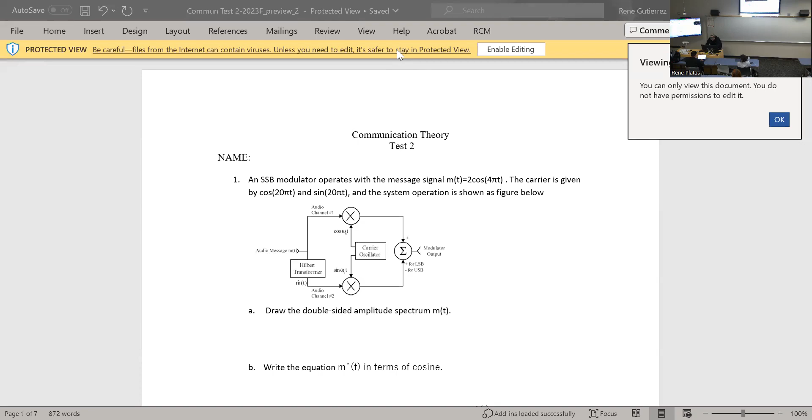But then if you see the screen share, you can't see the whiteboard. Stop share. Okay, I have to pin myself in order to record the meeting.

¿Qué onda? ¿Qué hubo? No, dale. Ahorita estás pidiendo. Good job, sir. Nobody else wants to come in?

Good afternoon, class. The first one is an SSB. What does SSB stand for? Single sideband, probably.

Modulator operates with a message signal. m(t) equals cosine, 2 cosine, 4 pi t, that's 2 hertz, right? 2 hertz. The carrier is given by cosine 20 pi t and sine of 20 pi t. This is the message.

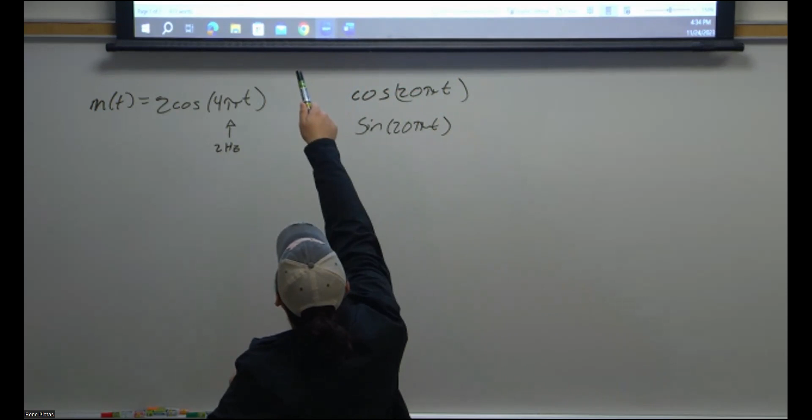The system operation is shown in the figure below. So it looks like it's the audio message signal, the Hilbert transformation. Do you guys remember what a Hilbert transformation is? I talked about it, all it is, you add or subtract, I forget, 90 degrees to the current message.

In essence, let me see, trying to find my notebook. The Hilbert transformation is the only one that doesn't change from frequency to something else. But anyway, let's deal with this problem. I don't know how important it is to remember what the Hilbert transformation is. Write it down somewhere, I don't want to give wrong information. That's all.

Hilbert, aha. So the Hilbert transformation is when you get your regular signal.

Renee, it's out of focus. Oh no, what, how did that happen? Did it just randomly happen? Yeah, weird, yeah, probably. Wait. Okay, yeah, that's good.

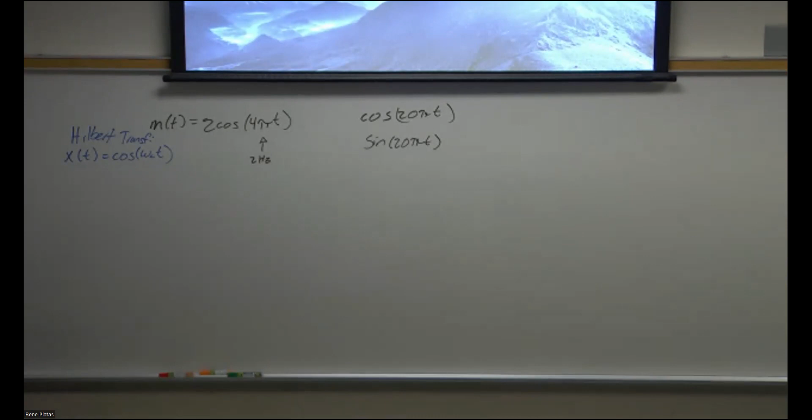So the Hilbert transformation is when you get your regular signal, and then all you do to get the Hilbert transform, which is this little hat here, is get cosine of the same thing, but you take away 90 degrees. That's just a little phase shift, that's all the Hilbert transformation is. Or you can also say cosine of omega minus pi over 2. Okay, so essentially you're getting the 2 channels there. One of them is doing cosine, the other one's doing sine, but in reality, they're both kind of doing the same thing because the transform changes the phase of it a little bit.

But anyway, what's the question? Draw the double-sided amplitude spectrum M, which is gonna be the message signal. Okay, now it says M(t), not M and t, remember? So we look at our thing here. It says double-sided, so it has to be centered at 0.

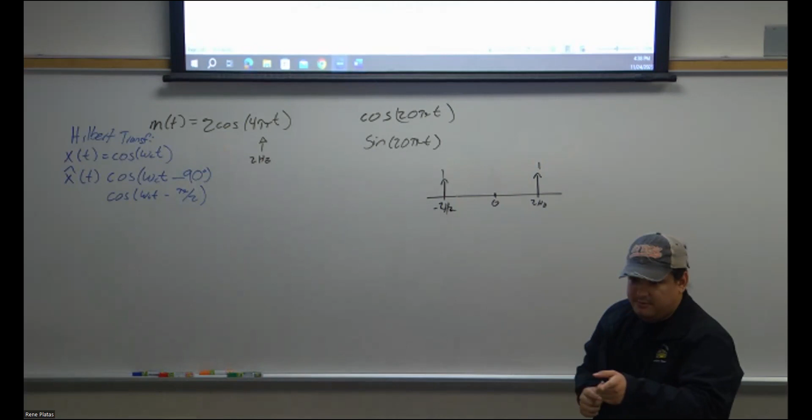And then we said this was 2 hertz, and there's gonna be one at -2 hertz, and the amplitude would be half of that, this is 1. Easy peasy, right? Is that what he said? Okay, peachy peachy, right? It says M(t), that's important, not M and t.

Next one. No, it says write the equation in terms of cosine, m hat t. So that's this one right here.

So we have our m(t), now our m hat t is going to be equal to 2 cosine of 4 pi t, minus, yeah, minus 90 degrees, or pi over 2, if you're feeling fancy.

That's it, it's also in terms of cosine, right? Right, okay, let's just put this one for that. This is the Hilbert transform, you can transform, you get your function and then you just shift it by 90 degrees. Pretty cool, right?

And then draw the double-sided amplitude and phase spectrum of m hat t. That's this one right here. Green.

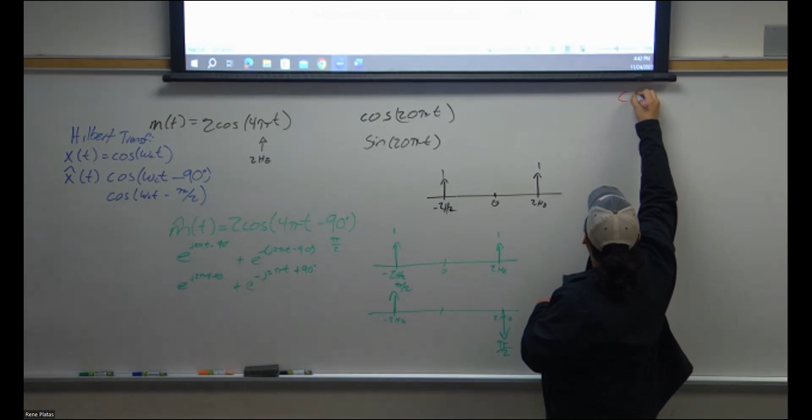The cosine of x is equal to 1/2 of e to the j of x plus e to the negative. That's where we lost the 2. From here to here, that's how we lost the 2.

Any questions? Nicole, you're being awfully quiet. No, guys, turn your cameras down.

Any questions before I delete this? I'm gonna keep this up so we can refer to it later. Can you move it to the right just a little bit? Oh yeah, you can see that? It's just out of sight. Make it a little bit smaller. How's that? I think that's good. Erase it, it says cosine.

Negative j2 pi t, the omega CT, it's like a basic... Oh, Euler's identity or Euler's formula. It's something to do with Euler. Okay.

Well, the double-sided amplitude, okay, we just did that. We did both of them, right? Oh, we didn't do the phase for this one. The phase for this one is pretty much there's 0, there's 2 hertz, there's negative 2 hertz. Since there's no phase shift here inside of the cosine, they're both 0.

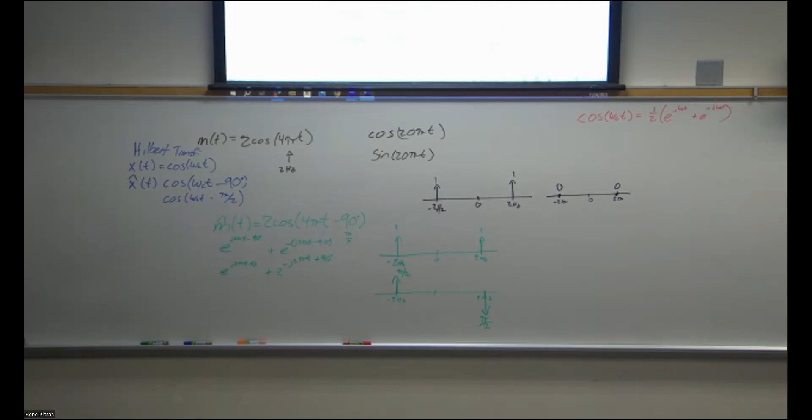Okay, sorry, you're right, sorry. Okay, can I erase this? Okay. Well, it's not that it's wrong, it's that the question was read incorrectly. So in a way, the question was wrong.

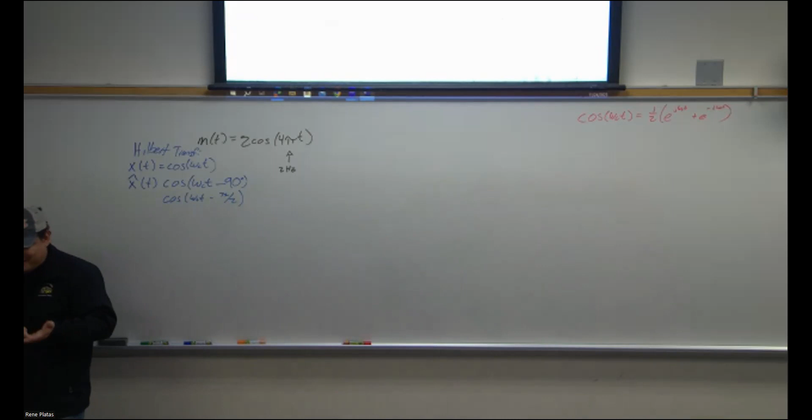Oh, it's because we did MT, the double-sided spectrum of MT, the message signal, M hat T in terms of cosine, which stayed the same. We did the amplitude and phase of MT, but then I thought this was the same thing as this, but it's not. It's a little bit higher frequency.

So for 1D, for people that can't see me pointing at the television here, 1D: we have draw the double-sided amplitude and phase spectrum of MT times the cosine of 20 pi. They're being multiplied, aren't they? For the problem, so we have our message signal, which is 2 cosine of 4 pi t times the cosine

of 20 pi t. And that is difficult, but we can do this together. That's 2 cosine, where's it at? I think it's half. 2 times 1/2 of cosine of 24 pi t, plus subtract them, cosine of 16 pi t. Is that so? Yes, yes, it's a trigonometric identity.

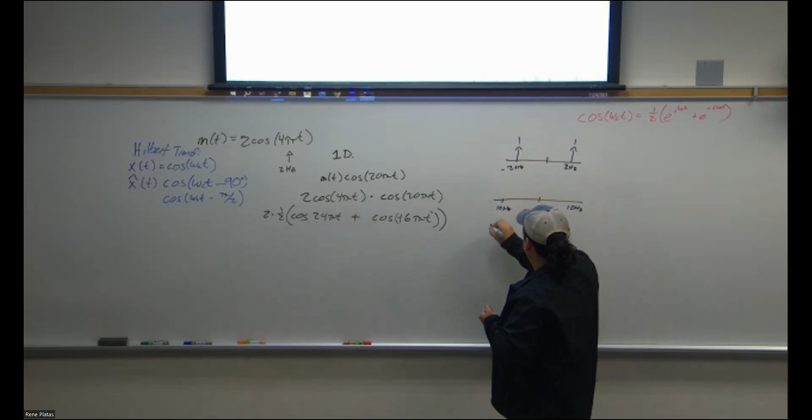So all we gotta do is take this bad boy right here, which is 1 and 1, if you recall correctly. We take this back over here, which is the same thing, but it's 10 hertz and 10 hertz. And they're both, well, this is actually one, so it's 1/2.

And we do the convolution. Easy peasy, right? You could do the trigonometric identity, but don't think, like Dr. Sun says, don't think it's easier to do it this way.

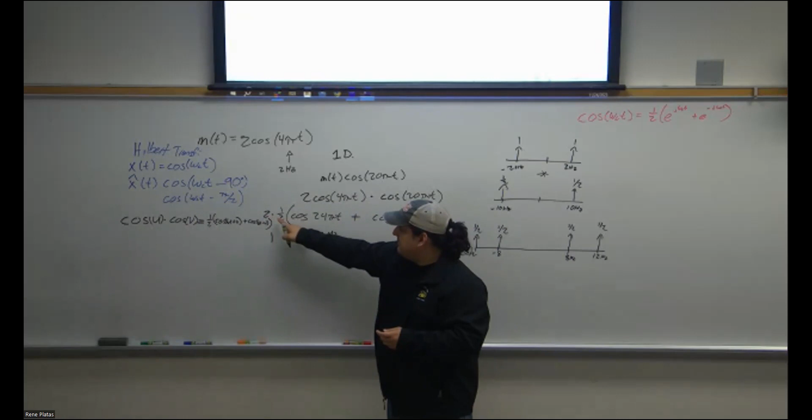So this 2 here, that canceled out by the cosine multiplication formula, where I believe it's cosine of u times cosine of v is equal to 1/2 cosine of u plus v plus cosine of u minus v. See this? So when you multiply 2 cosines, you get half of the amplitude, which is what we got canceled out here. That should have been another color. Man, I'm not used to drawing one.

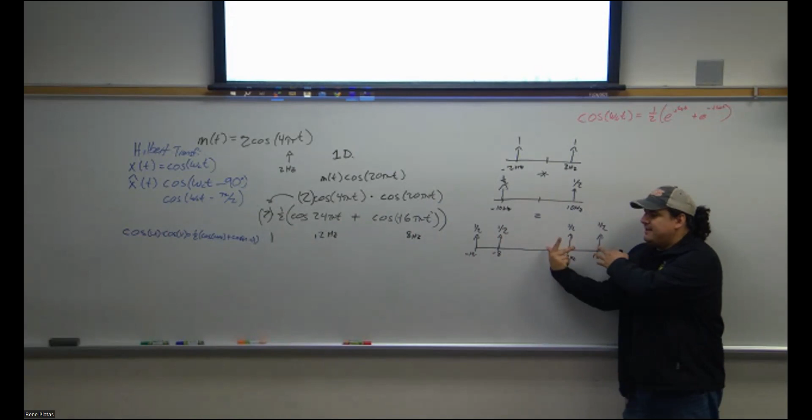Anyway, any questions? Nicole, Aaron, Carlos? On the third amplitude spectrum, those 4 numbers are 1/2, right? Yes. All 4? 1/2. Okay, thank you. Now, the amplitude here is 1. Why are they half? It's because it's double-sided spectrum. If you were to bring them back together, it would be 1. Okay.

All right. Here's the game. Draw the double-sided amplitude and phase spectrum of m hat t and sine of 20 pi t. For the phase of this, it would just be 0, right? For what? Oh, for the phase of this? The phase here, yeah, it'll just be 0. If you were to draw the phase spectrum, it would just be 0, 0, 0, because there's nothing here, there's nothing here. Very, yeah. So let's erase this, if I may.

The reason I'm using such a small space is so that it can be seen by the camera. Otherwise, I'd be all over the place, like I was in the other engineering building where there were all whiteboards.

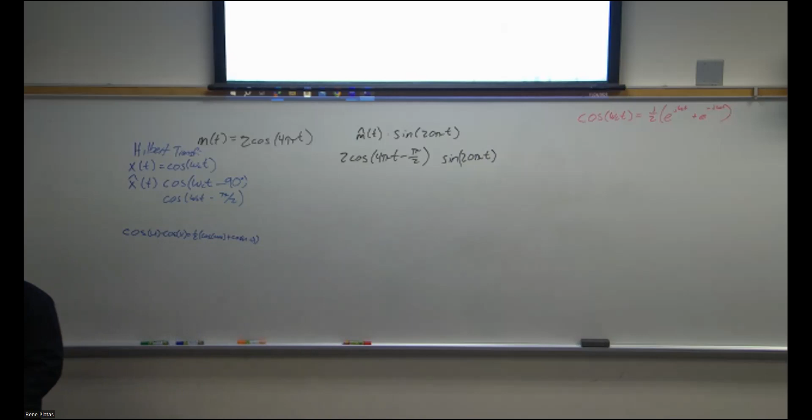Okay. So the question says m hat t, well, let's write it first. M hat t times sine of 20 pi t. M hat t is this minus 90 degrees. So that's 2 cosine of 4 pi t minus pi over 2. And this stays as a sine of 20 pi t. Now, we could just plug it in, but I think it's best to turn this into a cosine first, right? Yeah. So, in order to turn a sine to a cosine, I just don't remember if it was subtract or add 90 degrees.

That's where you wanna move it now. Yeah. So if you wanted to go from sine to cosine. Right. Yeah, but he's been saying just subtract 90, so just subtract. Yeah, so the sine is like this, and the cosine is like this. Right? So you want to move the sine to the left 90 degrees. So wouldn't that be 20 pi? Oh, wait, no, you're going to cosine, so yeah, it'll be minus 90 degrees. Minus pi over 2.

Right? Makes sense. You have a cosine, but you want it to be the same value as this, you move it to the right. Over 2 times, okay. Well, now you multiply them. Same thing happens. We have to do the same formula over here.

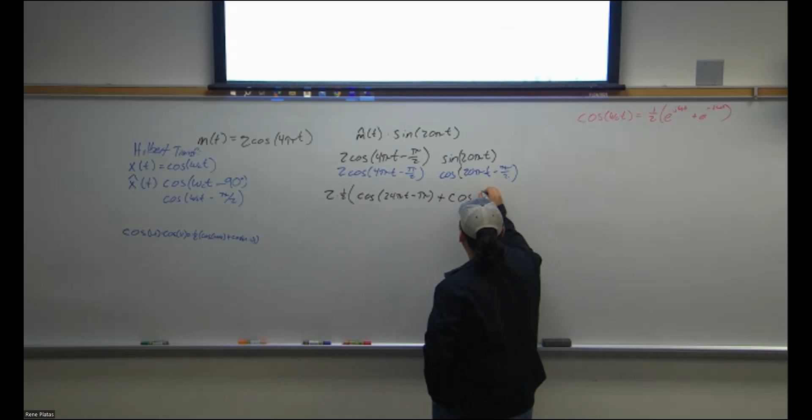Then we go 2 times 1/2. Sum of this, which is cosine of 24 pi t. Sum of this is minus pi, right? And then you add the cosine of the difference, which is 4 minus 20, minus 16 pi t. Difference will be 0. That stays the same. And that's it.

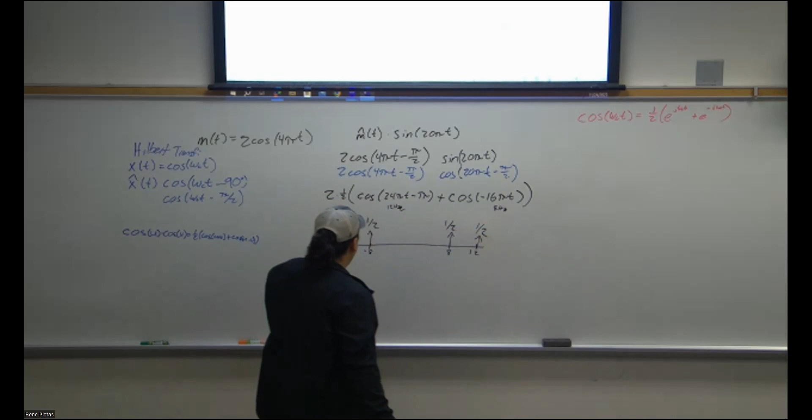Then the question says draw it. So we have our amplitude here. This one's 12 hertz. This one is 8 hertz. So we can go 8, 12, negative 12, negative 8. And their amplitude is all of them going to be 1/2. And that looks identical to the other one before, isn't it?

Again, this is the hard way. We could have done it the easy way afterwards, but that way we can visualize what happened to this phase here by doing it like this. And now for the phase spectrum, we have to draw the exact same frequencies. At negative 12, which is here. I like to transform it into an exponential first so that I can see what happens to the phase.

This one becomes e to the j 24 pi t minus pi, plus e to the negative j. Negative gets distributed, I forgot the e. So at positive 12 hertz, we have a negative pi. And at negative 12 hertz, we have a positive pi. So remember that the phase diagram should be symmetrical about the origin. So if this is going down, this is gonna go up.

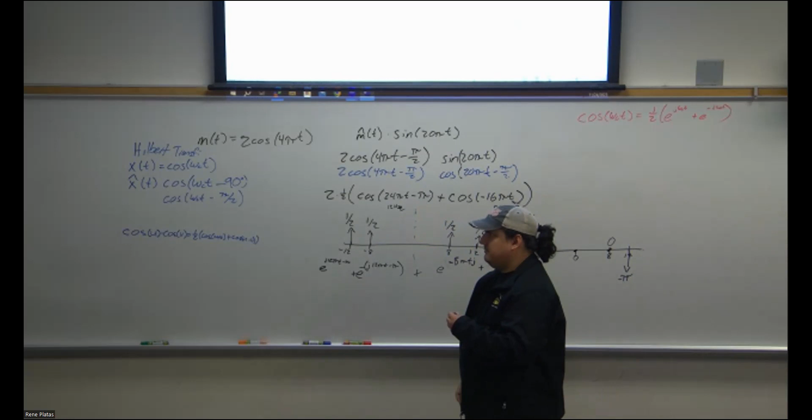So this is the phase spectrum, and this is the amplitude spectrum. Now this is maybe negative pi, but in reality, isn't it the same thing? Negative pi is the same thing as pi. Whatever. He will kill you if they're not symmetrical about the origin. And these have to be symmetrical about the amplitude axis. Questions?

Draw a double-sided amplitude and phase spectrum of modulator output, m(t) cosine and m hat(t) sine 20 pi t. So this plus the other one that was before, which is identical, but different phases. How would that look? Let's find out. If we recall, the previous one looked something like this. It was 2, 1/2 cosine of 24 pi t. There was no phase. Plus cosine of negative 16 pi t. There was also no phase. It was negative. I think it was negative.

Therefore, all we have to do is add this and add that, and we're done. Right? Yeah, it is the negative on the other one too. Maybe I was wrong there. Anyway, this is equal to m hat(t) times sine, and this is m(t) times the cosine of 20 pi t. So all we have to do is add this, add that, and the amplitude is 1 for all of them.

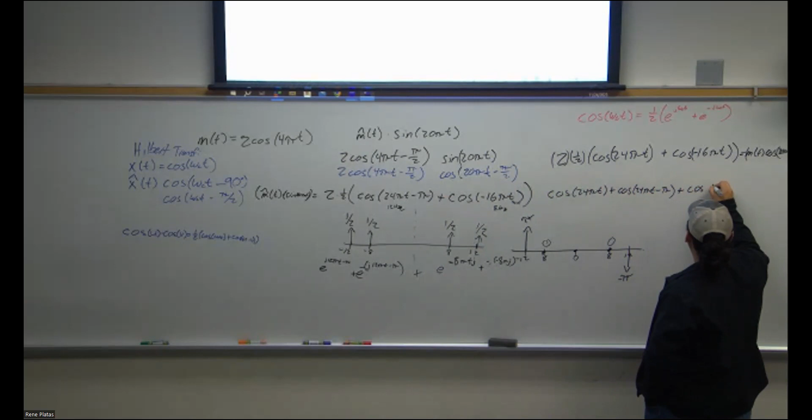So we get cosine of 24 pi t plus cosine of 24 pi t with the phase shift, which is minus pi. Plus cosine of negative 16 pi t plus cosine of negative 16 pi t, which is just double that. However, these two cancel out, because they're 180 degrees out of phase with each other. So these two go to 0, and all you're left with is 2 cosine of blah blah blah.

Is that what he put on this when he was working on it? I had done it, he gave me 100 on it, but he also said in class, just because we got 100 doesn't mean it was right. So I don't know if mine was right. You made it equal 0? Yeah, I had that equals 0 and I had 2 cosine of the negative 16. I lost my paper, so I'm not sure. So nobody was paying attention during this? Well, I think this goes to 0. We were doing the review, skipped this one.

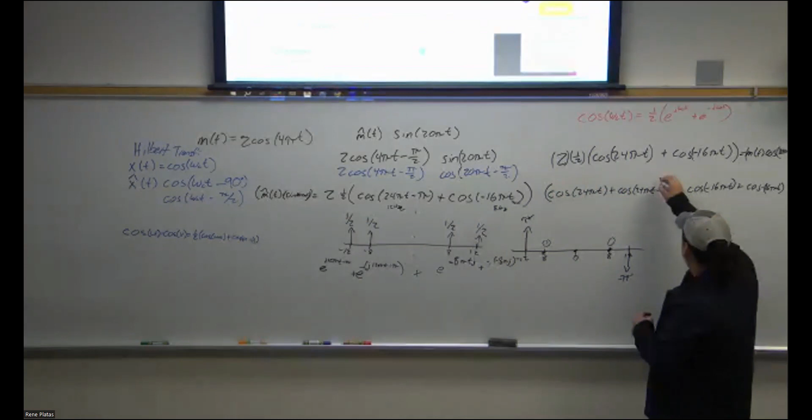Now what you're left with is 2 cosine of negative 16 pi t, bada bing, bada boom. And the question was, I don't even know if I'm answering the question anymore. The question was, draw it. So this is the only output. So we have our 8 and our 8 hertz. And the amplitude is 1. That's it. That's the answer for 1F.

Questions? Yes. In this case, yes, basically 0.

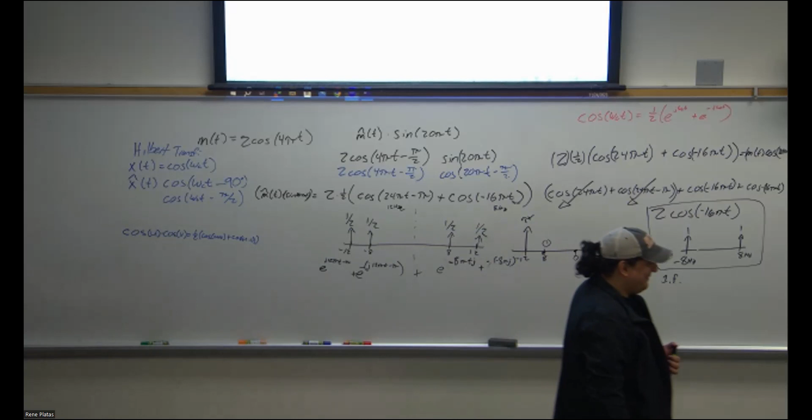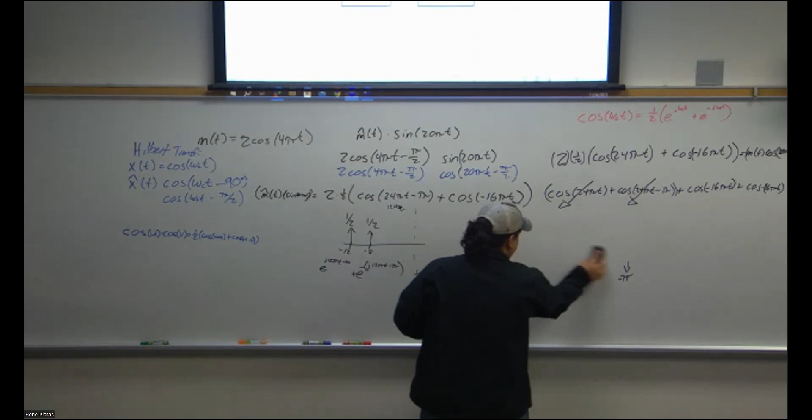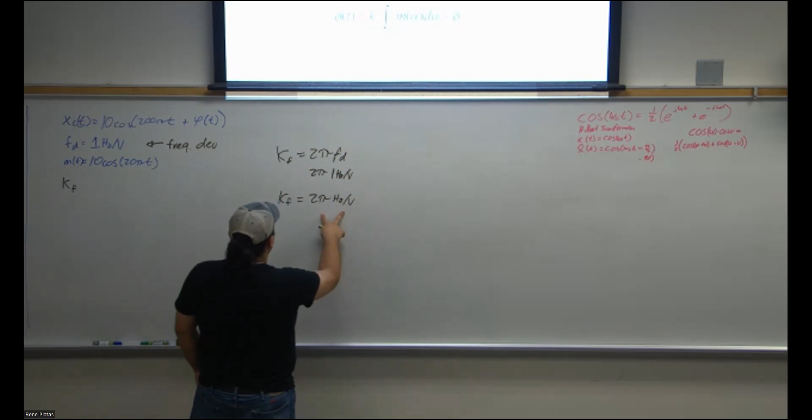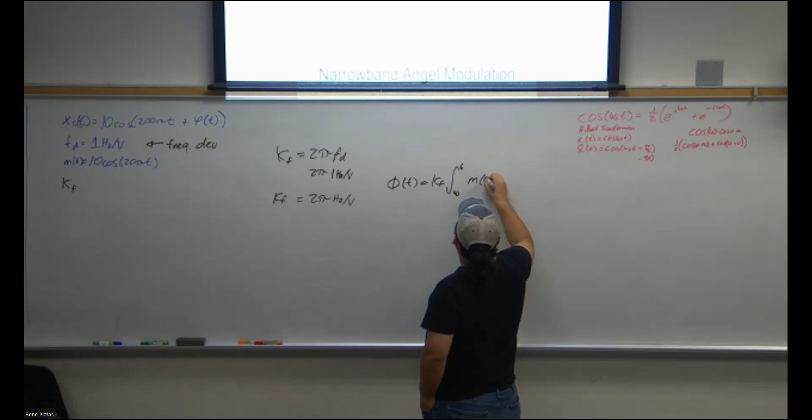Pretty sure. No, it's actually... Hold on. We just got our kf. Now, in order to get phi of t, we have 10 cosine 20 pi t. Oh, slow down. We have our this. I don't know what this is. But this equals kf times the integral over t. Are they both alpha? Yes.

Okay. And then we did 2 pi. We know what kf is. kf is 2 pi, right? This is from the beginning to one time interval, I'm guessing. So this is just one cycle. Does it matter? Okay. So m of alpha is 10 cosine 20 pi t. Guessing this is the message signal. So 10 cosine of 20 pi t, and then dt, not just in terms of t.

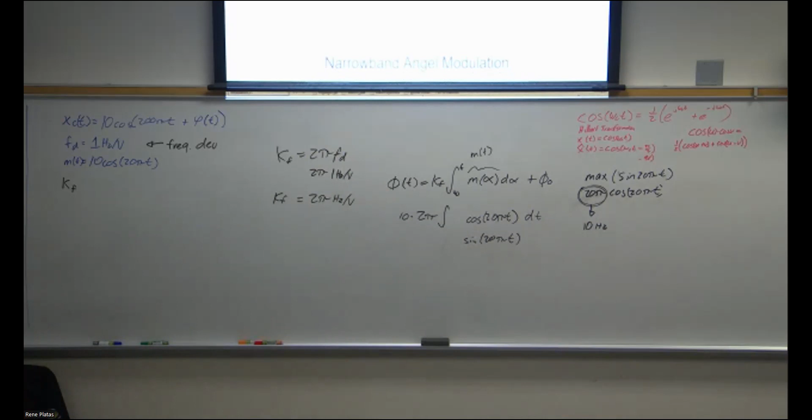This question says modulation index, which I need to find here. The constant beta is known as the modulation index, which is equal to these formulas. In this case, is it frequency or phase? FM modulator. So our formula is kf Am over omega m for the beta value. What is this, 3C right now? 2C. For those watching at home, modulation index beta is equal to kf Am over omega m, kf being that.

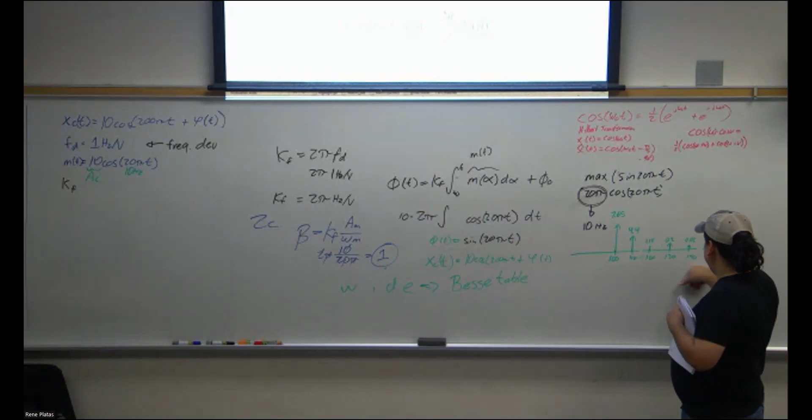Okay. So if they go in steps of time to look for time samples and you're multiplying also by 10? Well, they just both happen to be 10 in this case. The amplitude is 10 and the frequency is 10 hertz. In this case, they just happen to both be 10. So if that was like 12, you multiply it. And now this is our base. Okay, sorry, our amplitude. Now, in order to get the phase, we have to look at that, which states Jn is...

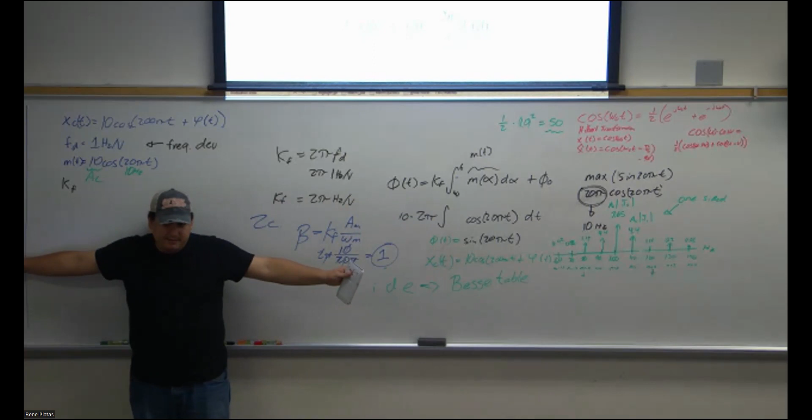And if we put them on top of each other, we would have this. This is the amplitude of the outputs.

Determine the power at the inputs. Oh okay, so we already got the x(t). Now we need to calculate the power at the input and the filter output.

So when we put this into a filter, a bandpass filter, it's gonna look like this. We said that the filter was center frequency of 100 Hz, so the filter is gonna be right here in the middle. And the bandwidth is gonna be 50 Hz, so it's gonna go 50 Hz across, something like this. Right, 10, 20, 30, 40, half, 50, right? The bandpass filter is only letting these through, not these.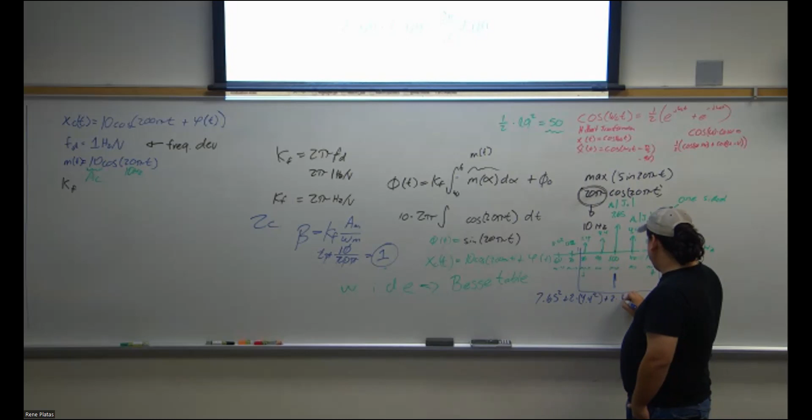That's the power at the inputs, no, that's the power at the outputs. This is the power at the output. Right? I just forgot the output again.

Well, it was given in the problem, at the beginning, that the center frequency was 100 and the bandwidth is 50. So it's just 25 this way, 25 that way, centered at 100.

And it's 49.94, that's what I believe.

Guessing most of the power is gonna go through because these are very tiny right here, so they're not gonna have that much of an effect on the power of the signal after it's been filtered. So I got 49.94. And the original power was 50 watts, so the filter dissipated 60 milliwatts.

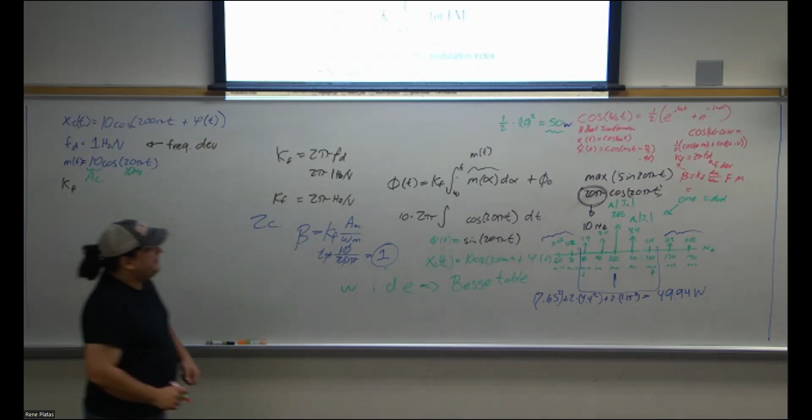Oh, this is very important. There's two of them. Beta is equal to kf times Am over omega m, for FM. And for the other one, AM for PM, kp and Am for PM. That's the case.

Okay. Sounds right. Okay, the other formulas that we missed.

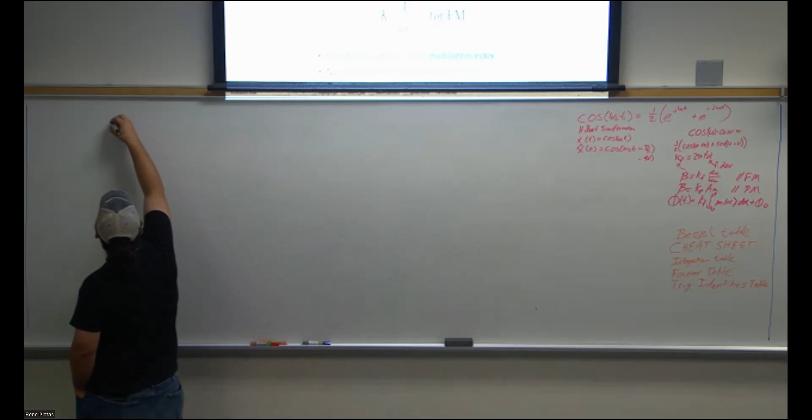Good if I don't make it private. Now I kind of wanna go like, somebody looking it up, like oh how do I do this? Let's put the answers in addition. I just gotta stretch. Just gotta stretch, you can answer. MT is equal to...

The cosine, last time we had some of, so what if, so that's probably. That's 10 hertz, is this? Yeah, number 3.

This message signal is 10 hertz. What? Your feet? Quiet, nothing's wrong with my feet. Okay, we know this is 10 hertz.

Determine the minimum sampling frequency required to prevent slope overload, assuming that the impulse weights, delta naught, are 0.1 pi. So,

So there's gonna be a slope, there's gonna be a signal that's like this, right? Now, our delta modulation is gonna just be little tiny steps over time. It's gonna be little tiny steps, right? If it's not steep enough, we're gonna miss out on a lot of the signal. See what I mean?

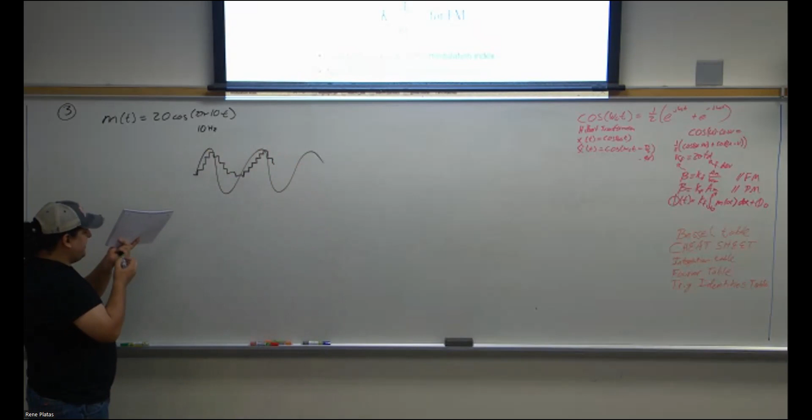Don't get ahead of me. If our sampling frequency is too small, we're not gonna get the entire signal. We can reconstruct it, that's the Nyquist rate, we can reconstruct the signal, but we'll lose a lot of information. In this case, our slope is, at time t, the height is 0.1 pi. Let's zoom in a little bit.

Right, so we need to find a t value that's small enough so that it has time to reconstruct the signal, as the signal can play out. We don't want to be sampling too slow, or else you'll get a lot of this missing. Therefore, we have our formula here that he gave us.

0.1 over t has to be greater than or equal to dm/dt, the derivative of the message signal with respect to time. Does that make sense? It's the slope. This slope, which is rise over run, has to be greater than or equal to the derivative of the message signal with respect to time.

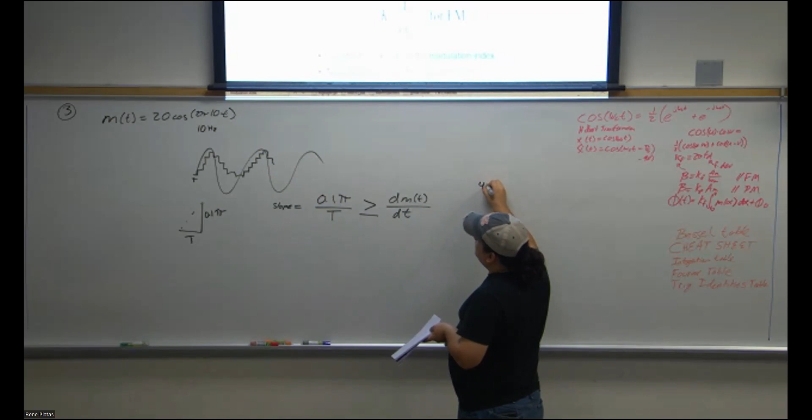The message signal is up there. All we have to do is find the derivative of that, which is gonna be 400 pi, negative sine, 20 squared. Wait, those 20 squared is 400.

So this is that right here, so you can replace this with 0.1. The derivative of the function? Did you just do the derivative of the original function, the message signal? The derivative of the message signal is this right here.

Oh yeah, I combined the 2 pi term and it's 20 pi. That's just how the problem is. I can see because of your face.

Now we wanted the slope of this, the slope will be at its highest right here. So the slope will be the highest right there, 400 pi. The slope right here at the highest point, make sense?

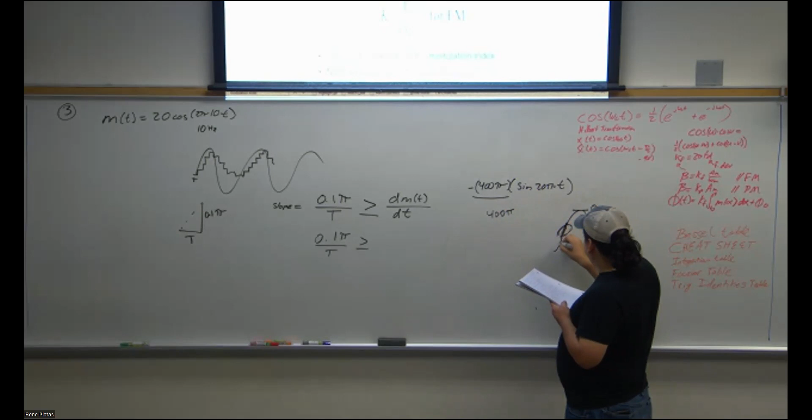Right here, the slope is 0. Right here, the slope is the maximum it's gonna be, and that's when it crosses the origin. When does this cross the origin? At, let's say t equals 0. Sine of 0 is 0.

We'll ignore that. This right here is when it's gonna be the highest point. So then that happens to be 400 pi. That's how fast it's changing.

I think this is gonna be at like 90 or something. Anyway, that's gonna be equal to 1, 2. Where's the formation? That is the derivative of this right here. Okay, so now we have...

This is greater than or equal to 400 pi. We can divide by pi on both sides. We can multiply by 10 both sides, we're left with 1 over t is greater than or equal to 4,000 samples per second.

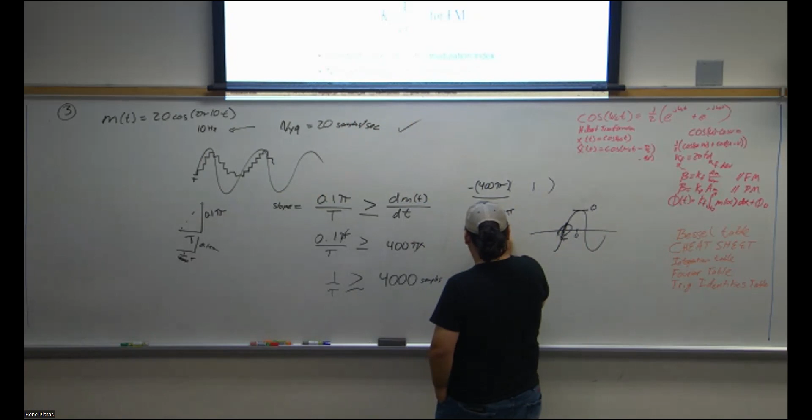Nyquist rate, the era, the minimum sampling frequency, which is 20 samples per second, and then that's the minimum. It does satisfy it because the 4,000 is a lot bigger than 20.

Now if this signal was a little bit less ample, it would probably be easier. If this was smaller, the derivative would be smaller, so you probably can get away with fewer samples per second. But in this particular signal, 4,000 is the recommended minimum.

Any questions on 3? Oh, you know why I was confused? Because this is local, right? And I was looking for... so I should have found the cosine. Yeah, whatever.

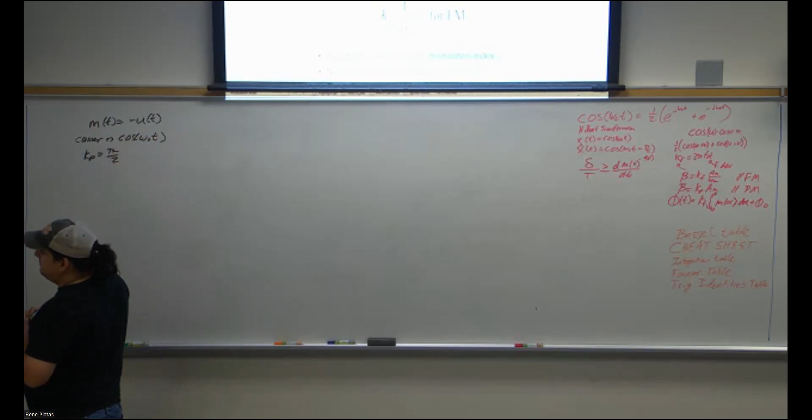Carrier, cosine. And okay, so it goes pi over 2. All right, that's all we need to know. Output of the phase modulator.

Well, when you modulate it, yes, there's a message signal, right? That goes in. This is a modulator, and out comes the carrier signal. I guess it's like with an X. We have a carrier, we have our mt, and now we have the output, which would be, I guess, ct, like that. So draw the output. The carrier is, that's cosine wave.

The message signal is negative ut, which looks like that. No, that's negative t, sorry, it's like this. Because if it was negative t here, that's when it would be over here. But since it's negative over here, it would be down here, negative value, negative amplitude.

So the output here just be their product. Now the output is gonna look like this. When you have your cosine and you multiply by -1, it's just gonna go like this.

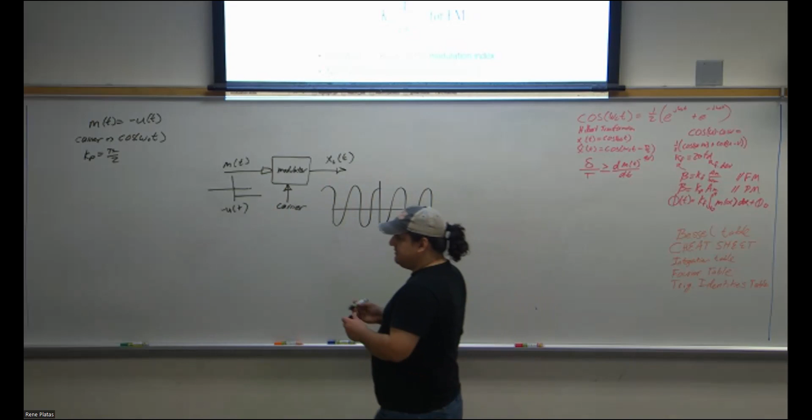Now it KPs. KPs. KP, extra information.

That makes sense. Not sure.

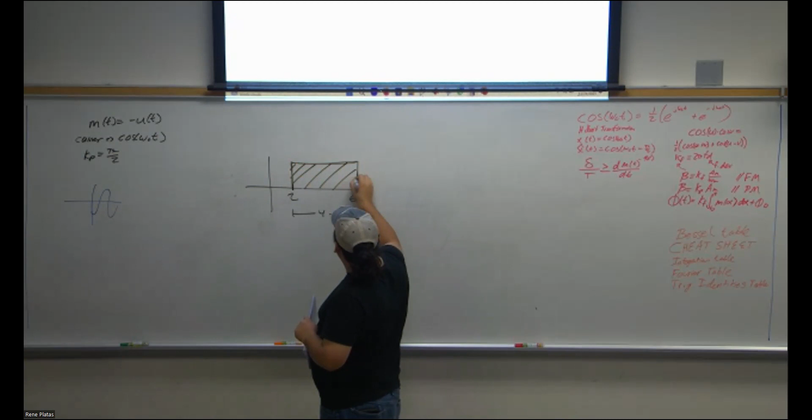The probability? One, the maximum probability. Yeah, one. 100%, right? So the area of this must equal 1. So if this is 4, this one has to be 1/4. Right? So that the uniform distribution is 1. Distribution of the probability coming to 1. That's it. That's the PDF.

PDF stands for... I wrote it down. Probability density function. Yeah. Probability density function. All right. Now for sketch 3 sample functions, he said it was like, I don't know what he meant by that.

The way he said it. The way he drew it, apparently. He said that these were acceptable answers, I don't know why or how. But he said a 3 and a line. And then a 4. And a line. And then he said again a 3. Line. That's literally the answers he gave us. Did you see it? I don't know what that means.

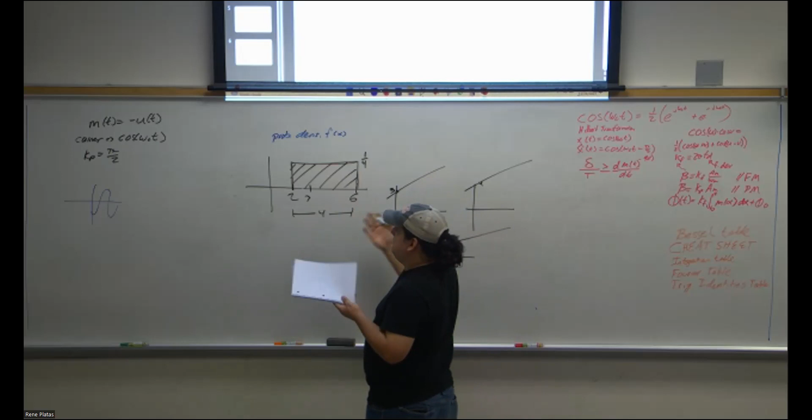It's the probability, like. Oh, yeah. So I'm guessing we fall somewhere here, let's say fall on 3. So you start at 3 and then the next one, I guess, goes higher, higher, because you're falling into 2 and 6. All I know is that I wouldn't put a 1 or a 7 here, outside of the bounds. So just put something between 2 and 6, and a line there. That's all I would do, honestly.

Yeah, so maybe because there's no negative numbers, it's not going down, it's only going up, because the only possibilities are between 2 and 6. Trying to read his mind. Find the expected value of x. It's still 5. Yeah. So, what's the formula? AT plus B. The formula is AT plus B. We said A was 1, it was given. B is between 2 and 6.

Okay. So we have T plus some number B. So when T equals 1. Find the expected value of x when t equals 1. What's the average here? 5. Because the average is 4. So maybe this would be 4 plus 1 is equal to 5. And he also said that when t equals 0, it would be equal to 4. I wrote it down, that's what he said.

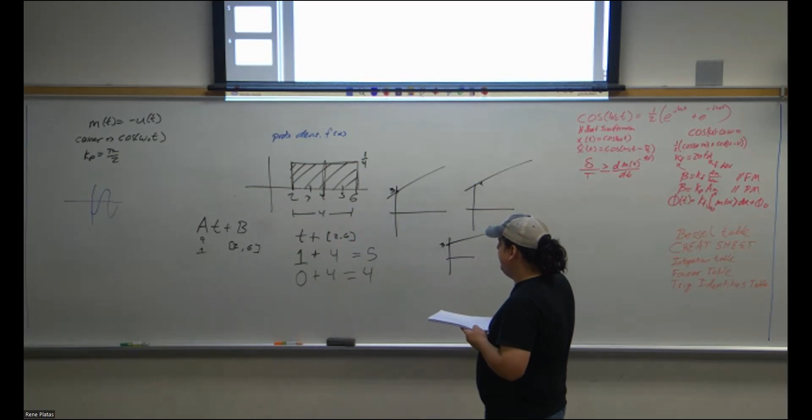Yeah, I know. So if the average of these values is 4, I'm guessing that's what you would add here for this B, which is between 2 and 6. So B is the range of this right here. So when you start at 0, right here, the average would be about 4. And then it just keeps going up. That's literally what he wrote down on Tuesday.

Multiple choice. Phase deviation constant KP equals -π for phase modulation. The carrier frequency is 100 megahertz. What is the phase modulator output for the message signal m(t)?

Oh, he wrote all the answers. Oh, nice of him. All right. And he was trying to make it hard for us. Couldn't like bold that. Highlight it. I was gonna go erase it. I was like, look at it here. What are you doing there? So, phase modulator carrier frequency is 100 megahertz.

Quiero que me... ustedes. Oh, right there. Correct. ¿Por qué le borras? I guess it just says C. Would it be C? Maybe he typed it. Imagine it. Why would you do this? I'm gonna game with my television. I'm gonna say this is preset 1. Idiot.

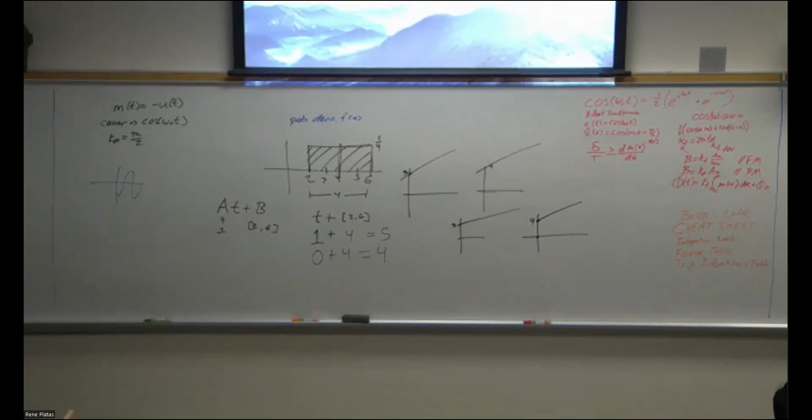Like 30 probably. What happened to the trash can? 6 minus 20. It's outside. It's outside. Like 14. I don't know, man. You're down for the laboratorio, man. I know he ain't talking to me. You're in my team, what do you mean? Okay. Well, camera number 2.

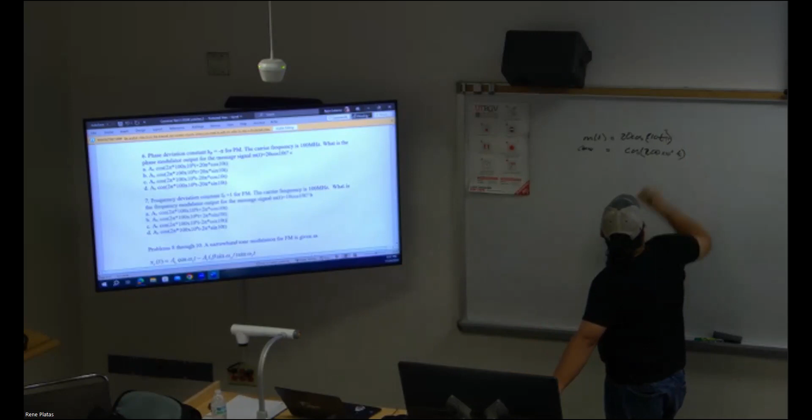It is gonna be a cosine. I'm guessing the sums are chingos, minus 10 is still chingos. Right? Oh, so that's 100 times 10 to the 6, negative pi, times 2 pi. Right? But minus that because it's minus 20. So.

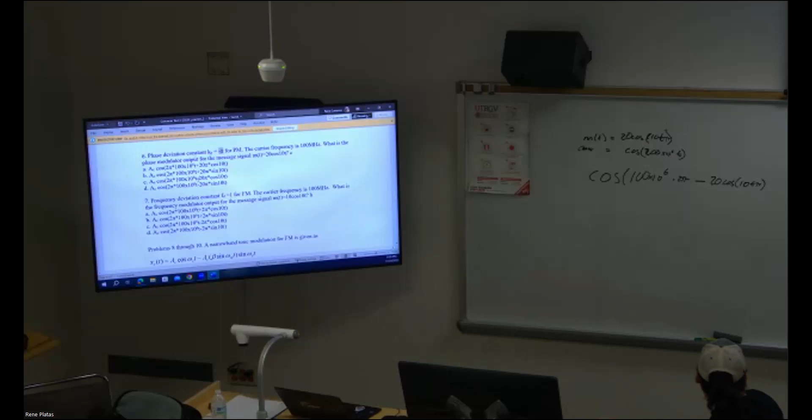Look here, I'll show you. Oh, KP, okay, fine. If it's multiple choice, maybe the same. The answer is the amplitude, which is AC, it's in terms of the amplitudes already. And then it's cosine of that, which is 200.

It's 2 pi, so it's times 100 mega. And then you subtract this because the KP is negative pi, which makes it inverted. So then it's just 20 cosine of 10 t. Wait, what? Because the KP is negative pi. But you still need to have pi, cause it's 2 pi. So you're multiplying the 20. 2 pi F, 2 pi F.

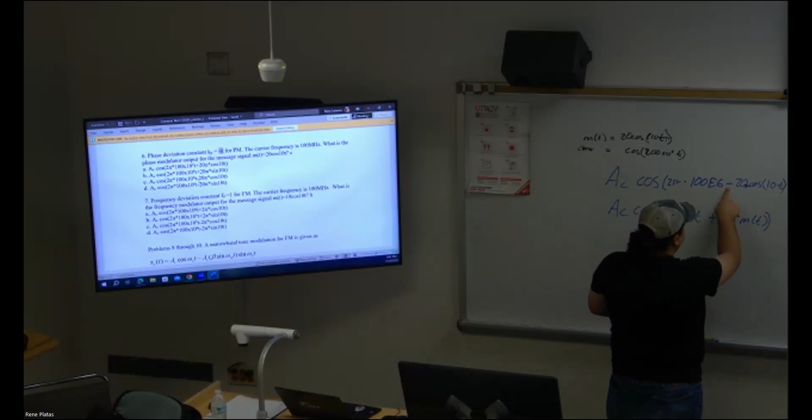That's because the formula is AC cosine of 2 pi times the carrier frequency FC, T, plus KP m of T. So this is the formula right here. Put one more parentheses. That's the amplitude, this is the carrier signal, which is 100 megahertz. KP is negative pi, which flips it and makes it destructive, and that's why it's negative. And it's 20, that's the message signal. That's why the answer is C.

Barely see that in the video. There's 3 people, they probably just recording. And that's why the answer for the first multiple choice is C. It's already 6. Studying all night. Alright, next question. We wanna get out of here, right?

Frequency deviation, is it the same thing? Well, there's a frequency deviation constant, not the phase deviation constant. It is 1 for FM. The carrier frequency is 100 megahertz, what's the frequency? Let's write this down first. More formulations.

Oh, by the way, you raised the line, so I don't think they can see that. Oh, yeah, I'll bring it up later. We're lining this.

And this is equal to what? XC of T, no, on here. It says XC, but put your little N in there. Well, output of the phase modulator, I guess, would be phase modulation.

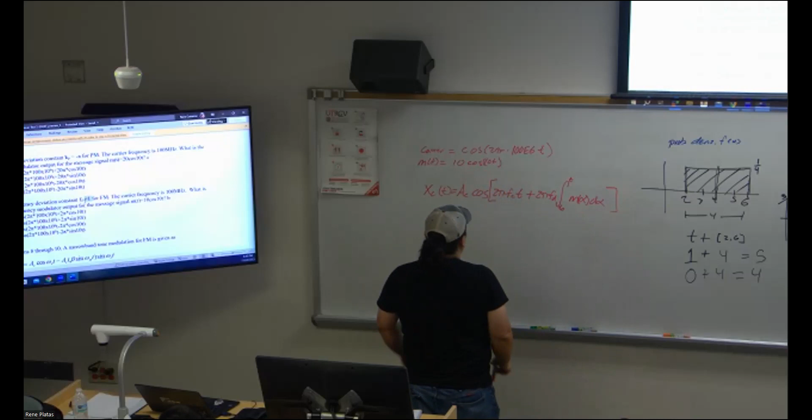T0, I guess, and then m alpha. M alpha, yeah, when I use the message signal. Alpha? Yeah, I don't know. And then close. So let's see what this integral is. What's the integral of this cosine, this message signal right here? I think it's just gonna be sine. What, sine 10t? Yeah.

So the answer is gonna be Ac cosine of 2 pi 100 mega t plus 2 pi, the f is 1, stays the same, and then sine of 10t. So is that it? Yeah, that's it. Wow. Formula wins, okay, easy. So this is for FM, so helpful. It's an easy win, okay.

So this is for FM or what? Yeah. f, frequency deviation constant, yeah, frequency deviation. It says frequency modulator at the bottom, yes, FM. x(t) is equal to Ac cosine 2 pi fc t plus 2 pi f times the integral of the message signal. Boom.

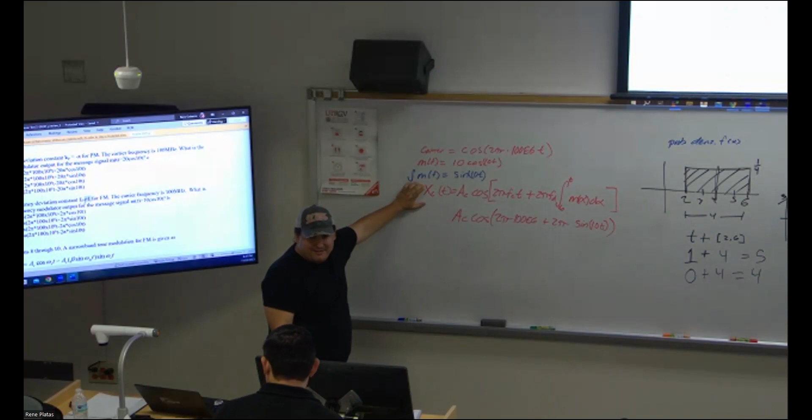So this formula right here, we plugged it in, the integral of our message signal is just sine of 10t, and that's where the answer is.

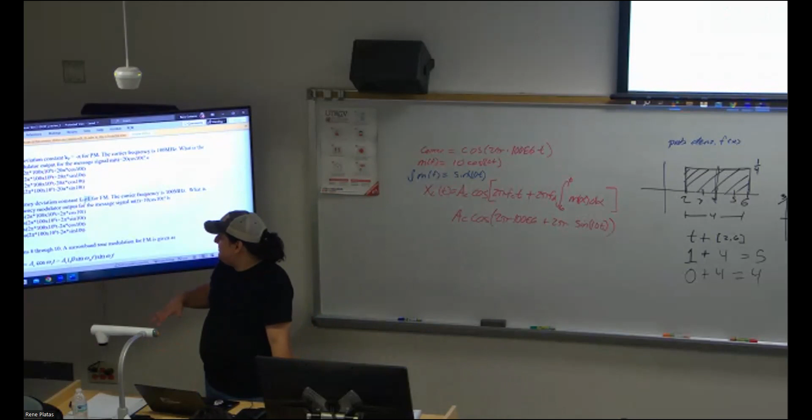All that calculus. If I was to do integration by parts, I'd die. I'm barely even literate in u substitution. It's as high as I'm getting. I remember in calculus 2 one time they gave me a problem that did like 3 or 4 iterations of integration by parts. I'm like, fuck that. You miss one negative and it's fucking over. Yeah.

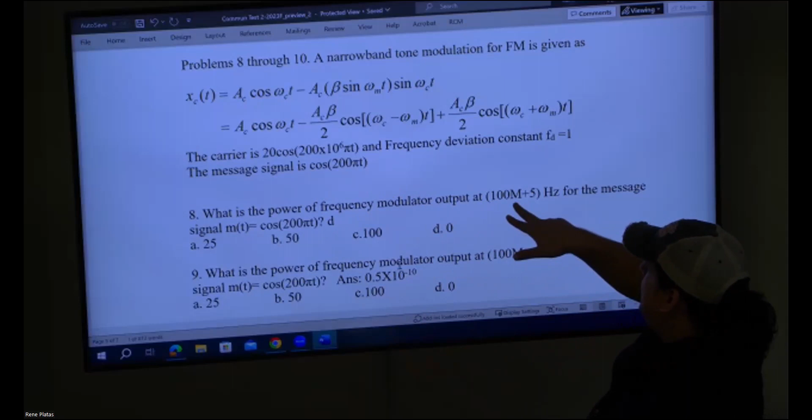So the next one says, for problems 8 through 10, a narrowband tone modulation for FM is given as this. The carrier is 20 cosine of 2 pi 100 megahertz. The frequency deviation constant is f equals 1, the message signal is cosine of 100 hertz. What is the power of frequency modulator output at 100 mega plus 5 hertz for the message signal?

Vamos a la 8. It's supposed to be 0. We're on 8. Okay, well, let's use a formula. Is this a formula again? FM? Yeah, this is our FM. So our f is 1.

Our message signal is cosine of 200 pi t, so what's the integral of that? 1 over 200 pi. What's the formula for power? I think we have to find the signal first, and we'll probably do it in the phasor diagram. And this is gonna be sine again, 200 pi t, like that.

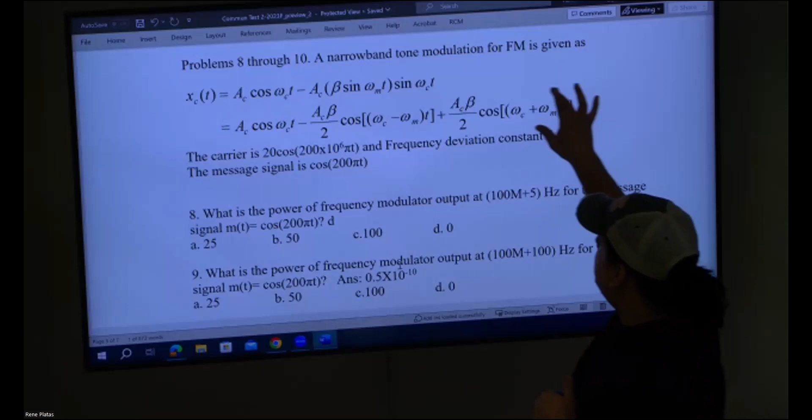Do you have to use the Bessel table again? No, because it's narrowband. That's for wideband. Well, let's use this formula right here. They must have given it to us for a reason, right? And not just put it there for no reason.

True. Can you see what I'm doing? You cannot see what I'm doing. You guys need to speak up. There's no one there. It's on. No, they're still there. Sorry, I went to the restroom, so I didn't see that it wasn't turned on. What? The turkey came out.

This is the formula. We already knew beta was very small. That's why I raised it. Let's write down the formula as it is given to us. Did you write in the problem? Well, I didn't even write anything, cause it was wrong, no? What I had written down was that I calculated beta by using k_f, A_m, and omega_m. But we already knew beta was very small because the problem says narrowband modulation.

So we have the formula, which is A_c cosine of omega_c minus A_c beta. Look at the top one, I'll look at the bottom. Do we want to look at the top or the bottom? Oh, I want to simplify. It's longer, but anyway, let's try. A_c beta over 2 cosine of omega_c minus omega_m t, plus A_c beta over 2 cosine of omega_c plus omega_m.

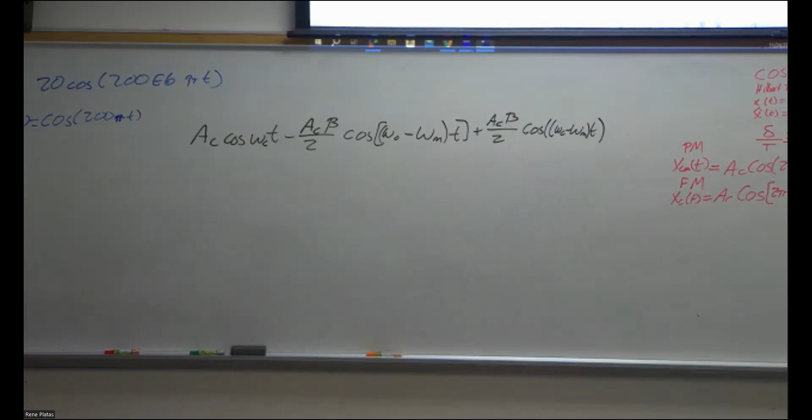Okay, what does this mean? You got me there, son. Will these two cancel out? Yes, it should. No, this has got a plus and a minus in the cosine. Oh, okay, I see it. Yeah, alright. Okay. So we know the amplitude of our carrier signal is 20.

Cosine of the carrier signal, which is 200 million. Oh, 100 million. Alright, I guess 200 pi. Minus A_c, carrier signal. This is tiny, beta was 1/100, right? Yeah, but okay, look. Over 2. And then the carrier frequency was 200 million. Minus... you forgot cosine. Oh, I see. Thank you. Good job, that's extra credit for everyone.

200 million pi t minus message 200 pi t. Plus, and again, 1/100 over 2, cosine, the same thing, but instead it's plus. Okay. Now we got the power. What's, okay, 2/100, 20/100, or 2/10, divided by this. Here, this 10 cancels 100. And then it's 1/10, so this is all 1/10, right?

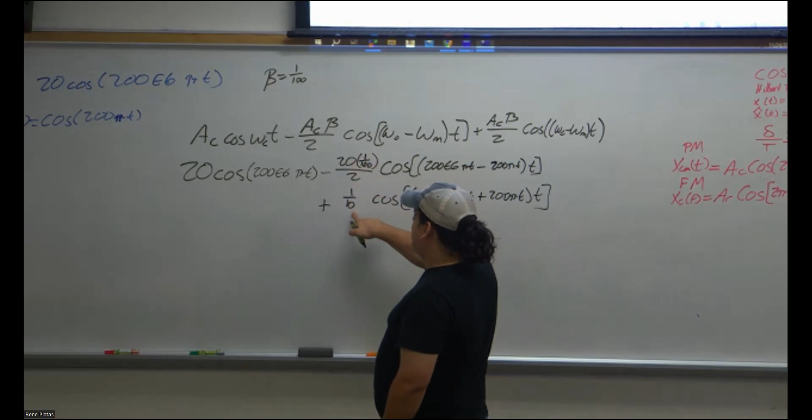Oh, but you forgot a 50. Wait. This is equal to 1/10, right? Yes, it's divided by 2. 20 divided by 2 is 10. 10 divided by 100 is 1/10. But it's not divided by 50? Because you said 1/10, don't you have to divide 2 into everything? Would it be 1/5? Wait, why? 100 divided by 2 is 50. Or am I thinking that wrong? Well, it's 20 over 100, which is 1/5, but then divided by 2 is 1/10. What's the power of this?

First of all, you get squares instead of cosines. Yeah, that is difficult.

Is this the answer? Oh, we have to take into account 100 plus 5. That's the key here. What's the answer to that? The answer is 0.5, it's not even there. That's 0.

Well, I'm guessing it's about 0. Yeah, but it's a huge, it's a really tiny number, so it's very close to 0.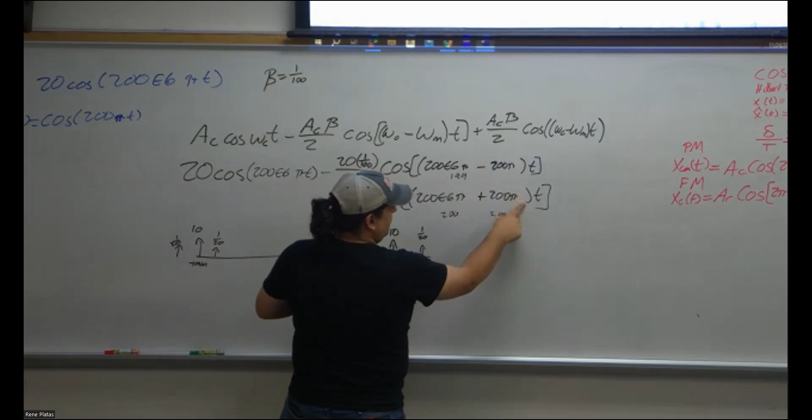No, is there no T? Yeah, there was no t. There's no t's in here, so yeah, you can probably subtract them and then you end up with... it's a T, does it? And then you end up with a spectrum that looks like this. So then plus minus 2 plus 10 squared.

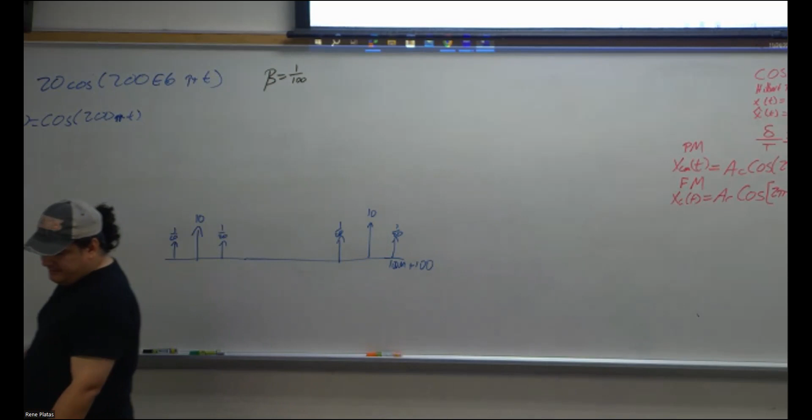Well, I can just remember that it was right here was 10, 1/20th, right? 1/20th, and over here again was 1/20th. And which is not to scale for sure. Okay, and this actually right here is 100 mega plus 100, right? So the power right here would be that quantity squared, which is 1/20

They figured it in, the same. Let's just go to the one we can confirm. We're at 100 meg, it's probably B, 200. Why is it 200? Because it's 10 squared plus 10 squared, I guess.

Let me see. Well, this is for 10. For 10, we're doing 10 squared plus 10 squared, that's 200, and that's why it's B, you guys see?

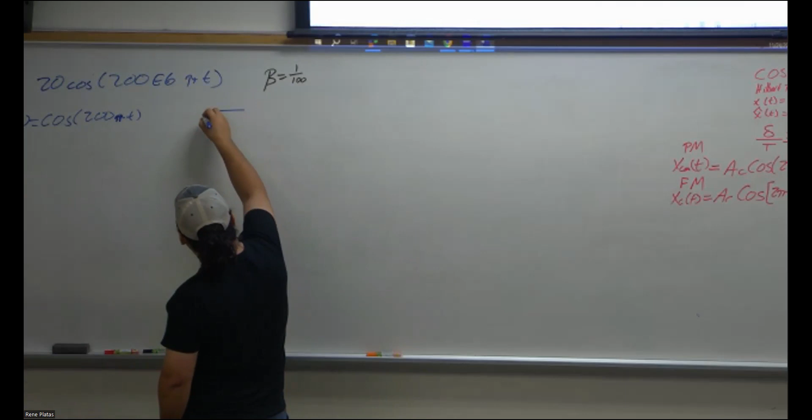Okay, how many digits in binary do you need to make 100? For 1 you have 2, for 2 you have 4, 3 you have 8, 16, 32, 64, 128. So 7. Oh, the answer is 6.

Sorry, so one, you got from one. Is it one? Yeah, no, it's supposed to be half. So the fact that it's within 1% means that right here could be 1/50th to 0. There's 50 steps right here, and that would be within 1%, something like that.

We're gonna get there somewhere. Pulse code modulation, that's what the PCM means, pulse code modulation.

See, when it was 0.005 error, it was 100 levels. If we were to double this, it would be 0.01, and it would be 50 levels. That's why it's 6.

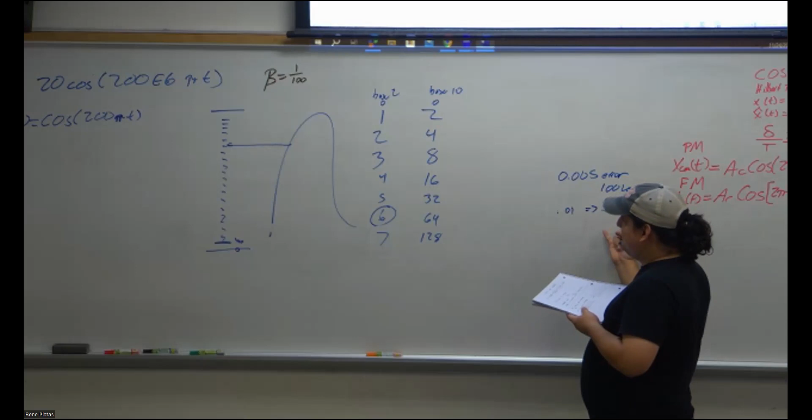Don't you start the count at 0? So right now there's 50 levels, and the maximum amount of wrongness you can have is 1%. You have an infinitesimal amount less than that, you'd be at 0, and that would be very long.

Get the inverse of this. That's 100 divided by 2. Got it? Got it, thank you. Inverse of the error divided by 2, that is your number of levels.

Okay, but once you know your levels, how would you know to pick 6? So you have 50 levels, you need at least 6 binary digits.

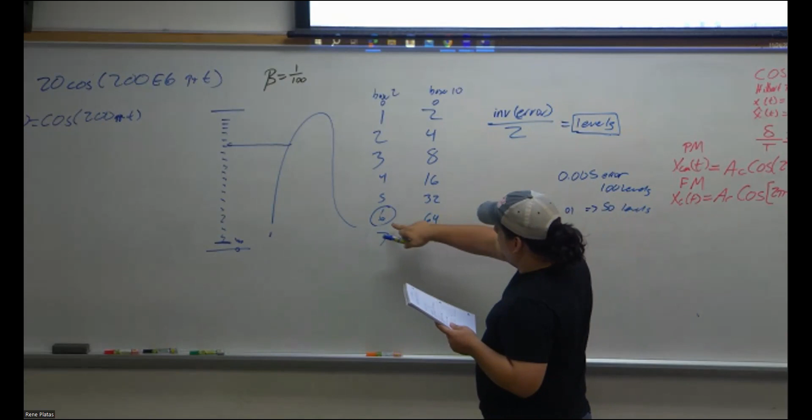Sorry, that was louder than I thought. So for, that's your levels, then what? It's 6, I'm trying to really understand. That's kind of because I...

For the question, plus or minus 1%, for pulse code modulation: you get your error, you get the inverse of the error divided by 2, and that'll equal your levels. And then from your levels, check minimum binary.

Okay, 64 close to 100 or 128? Well, you don't want to go below, you need at least that much. So you want to go above 50 levels, so 6 digits. If it was like 40 levels, I would still go with 6.

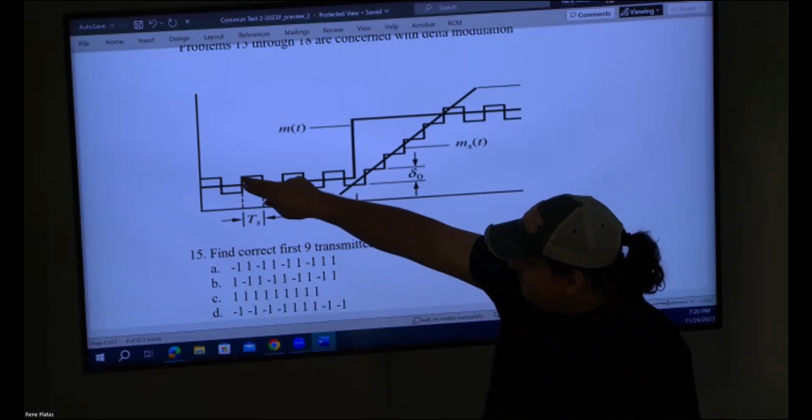The first correct 9 transmitted signals are... by the first, well, 9 different signals. You're starting at a reference point. The reference point is right here. Then the first trigger goes down, so it's -1. Next trigger goes up, +1. Next trigger goes down, next trigger goes up, next trigger goes down, next trigger goes up, down, up, up. That's why it's A.

So these are triggers, not where you start. This is a reference point that could have started a long time ago. So you start at the next trigger, which is 1. At least that's what I'm thinking, that's the only reason I think it's 1.

It's A. Is there something that's directly inverse of this? Yeah, that's second one, B. Second is directly inverse. Oh, but the last thing - oh yeah, the last one, same. The last one is negative, -1, plus 1. So no, this is just shifted to the right once, all ones.

Knowing me, I would probably choose that one. If you choose A, that means you're not counting where it started. If you choose B, that means you're counting where it started. Yeah, but the answer here is A, so I guess you don't count where you started. Don't count when you start.

Basically go off the triggers. Yes, after T equals 0. Yeah, I mean, if T equals 0, because nothing happened.

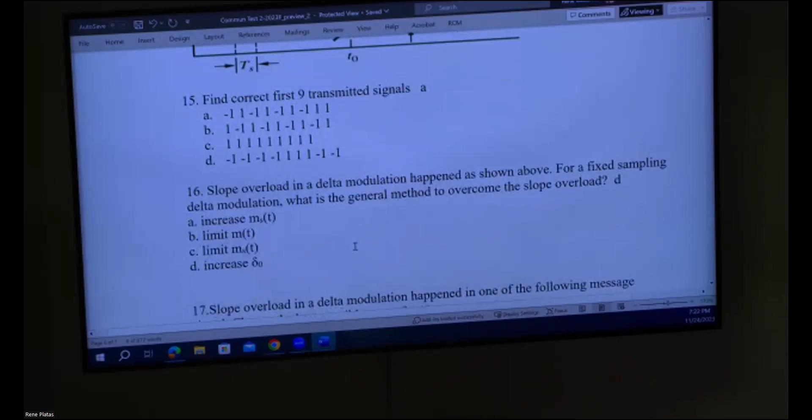Slope overload in delta modulation happen as shown above. You see that this is rising a lot faster than this can rise, so instead of showing a nice sharp rise, it's showing a line.

For a fixed sampling delta modulation, what is the general method to overcome slope overload? So you cannot increase the number of samples per second. What can you increase or decrease? In this case, the answer is D, which means you increase the weight of the change.

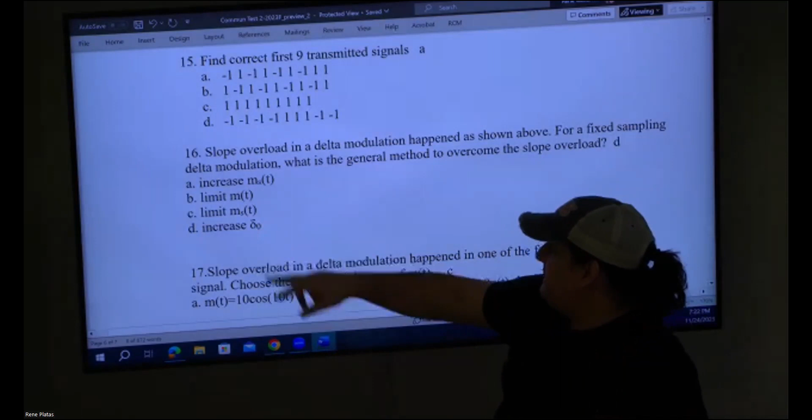But then in this case, if you were to do that over here, it would be higher. So, one of the ways to overcome it is to increase the weight of the slope. Limit MST, limit MT - you can't limit your message signal. That's what you're starting with, you can't change your message.

Now I'm not sure what needs to be done, but in order to overcome the slope overload, you could just change the amount of changes - it happens every time you change. As in, make this bigger. I guess this is MST, which is... make it wider? Makes it wider or what? I don't know, MST, I'm guessing this is just the signal. MST is the modulated signal label, so you can't change the modulated signal or the message.

That's the trigger. So instead of taking 1, 2, 3, 4 to get to MT, it would only take like 2 if you were to double it. You know what I mean? Slope overload in a delta modulation happen - choose the best possible case of MT.

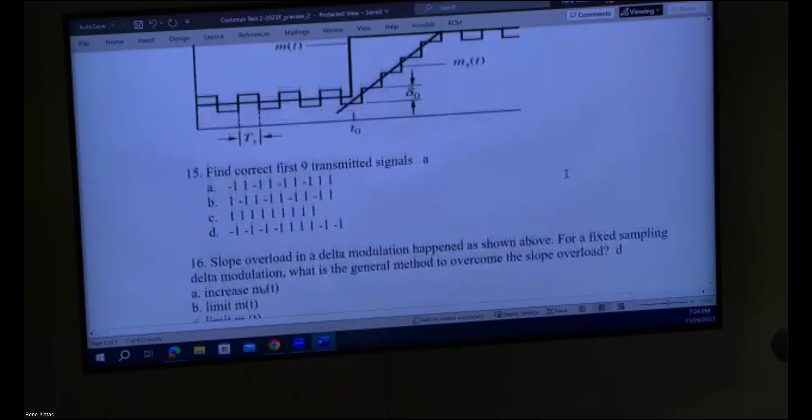I guess, perfect. Yeah, I guess there's, I don't know. The slope overload. Well, isn't it because of the unit step function? This would be a height of 10. Yeah. Oh, yes, m(t), particular. So this is just a message signal of 100. But it doesn't show. So t0. Yeah, what's it doing? And t0 is just when this happened.

So choose the best possible case of m(t). So when the message signal is just one line, a unit step? Is that a step function? Yeah. When the message signal is 10 hertz with an amplitude of 10. Again, 10 hertz with an amplitude of 10. A flat line with an amplitude of 10. Or m equals 100. Oh, okay. An amplitude of 100.

Love your shirt, by the way, where'd you get it? Walmart?

Yeah. So, the best possible case of m(t) is when it's just a flat line and it's not that big. It's also a flat line that's gonna take forever to reach the right tone. ¿Qué más? Generally, what is the advantage of adaptive delta modulation compared to delta modulation? Yes, these questions, I guess it's just a definition you have to memorize. Yeah, overload, I guess. Just remember all the multiple choice. Yeah, I would write them all down in the cheat sheet. I even got it wrong.

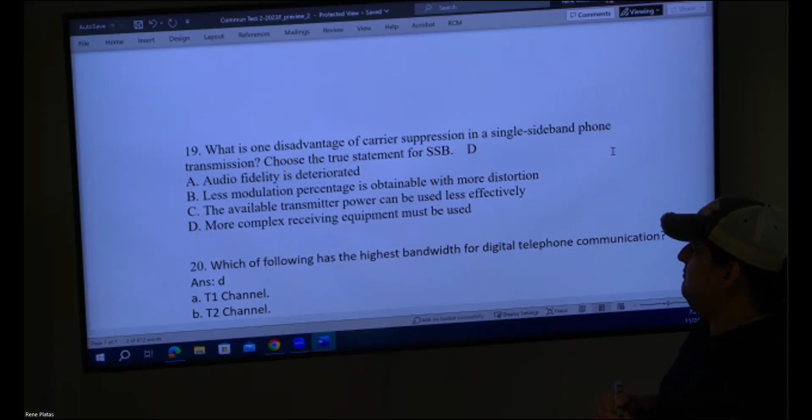What is one disadvantage of carrier suppression in a single sideband phone transmission? Carrier suppression. Choose a true statement for single sideband. I guess we just memorize that too. Well, what if they ask like double sided or something? So that's why you write down all the answers. Disadvantage of carrier suppression. I don't think he would ask about those. He already says it on that sheet. Single sideband phone transmission. More complex receiving equipment, must be this, I guess.

You know what a single sideband and double sideband is? When you have two signals like that, the carrier function. You're using this and this as one sideband. This is the lower sideband. This is the upper sideband. So you could just use one single sideband, the lower sideband, because the rest of the information is over here. But it would cost more complex receiving equipment just to pick up this side instead of the whole thing. You know what I mean? Oh, yeah. So that's probably why.

Which of the following has the highest bandwidth for digital telephone communication? I guess the higher you go, the better. T4, it was T4.